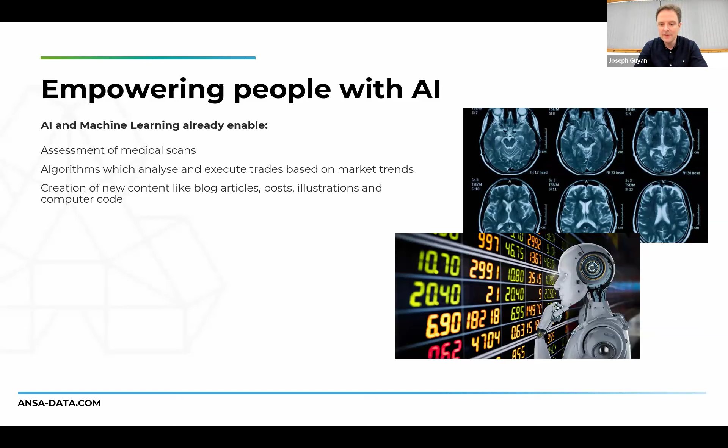Looking at the general topic of artificial intelligence and machine learning, it's a huge topic at the moment, and you've no doubt heard about it already. If we look at it in the world, we can see that medical scans are being assessed quicker and more accurately, or helping experts to assess those scans. We see AI analyzing market trends and performing trades. We see AI generating content, articles, blog posts, and even computer code.

Just like all these well-known applications, we're using AI and ML techniques to help you become an expert with logging data. We're trying to speed up time-consuming elements of checking data, processing it, and then presenting it. You need to process the data and then give out that report at the end of the day. So this is where we're helping you.

Just like where your phone might be telling you where to eat that night based on what it knows, Clarity will be telling you and your crew offshore what steps you should be taking next.

So we're narrowing it down a little bit now with multi-finger caliper processing in particular. As I talk to various elements of Clarity, wherever we're solving problems for you quicker than before or more accurately or reducing complexity, this is basically where our expert system comes in. So an expert system allows for consistency of approach, cost reductions through reducing human involvement, all the while increasing accessibility.

So we call this expert system PRISM. This exists within the software Clarity. Wherever we're using these new techniques to make the job easier, we'll be using what we call a PRISM module. And I'll just talk to a couple of those before the demonstration.

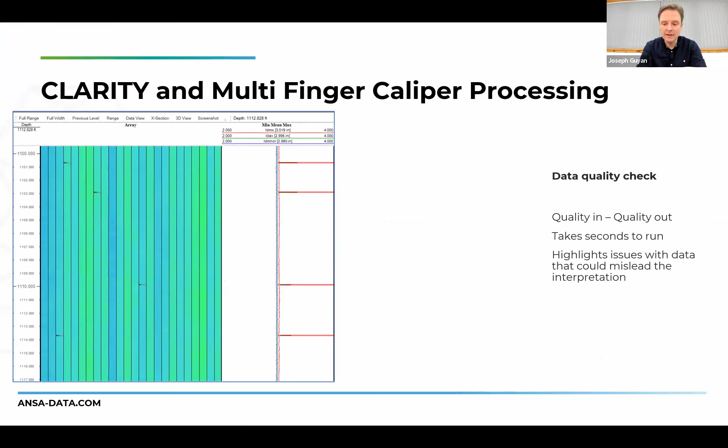You want to identify any issues that are present in your data set that might hinder your interpretation. You can use the Mark 1 eyeball to scroll through your data set, or you can use PRISM quality check, scanning the data for you in seconds. It is literally seconds, for any patterns consistent with any of the quality issues that could affect your data set. We'll see this action in our demonstration, but this is what it's going to look like.

It's actually going to scan your caliper data set and report on some of these tests, perhaps looking for clogged or malfunctioning arms, tool stick and slip, which can affect your data set and your interpretation. On the screen there, we've got a report of some data spikes. A spike is very easy to identify automatically, and we'll see that getting treated in the demonstration. This report really just highlights the issues, saves time scanning. We can also offer editing tools at this point as well.

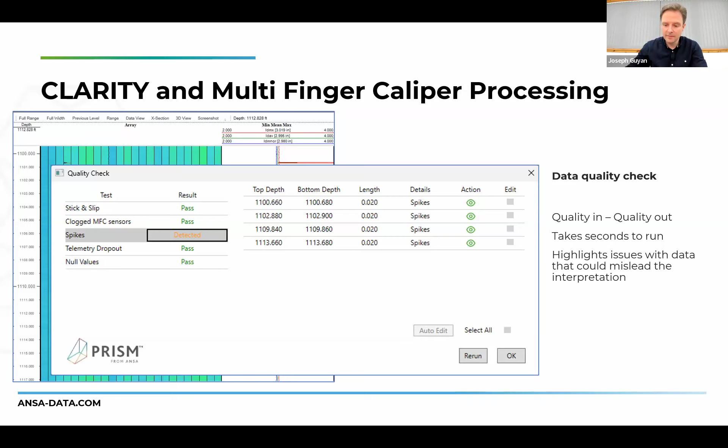Next, I'll touch on centralisation. This is one of those topics that is easily worth a number of hours, you can talk about this forever. If you want to break it down very quickly, it's a process that you absolutely need to do. You need to deliver some of the values that you can talk about in the report.

It's a great place for PRISM to actually interact and help you, because there's a number of parameters and options that are available for users to choose in different pieces of software, and that takes expertise. So this is definitely one of those places where you want to click on PRISM centralisation to give you the correct answers.

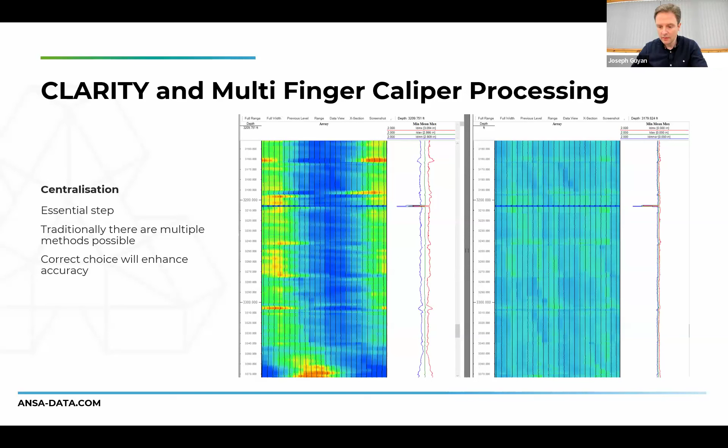On the screen here, you can see a visual representation of the choices that Clarity and PRISM is making for you. On the left is your recorded values with a number of high radius values and a number of low values. So centralizing this data set should require a varying number of parameters to be chosen all the way through. In reality, what happens is a compromise situation where the analyst will be forced to choose just one to cover this little interval here.

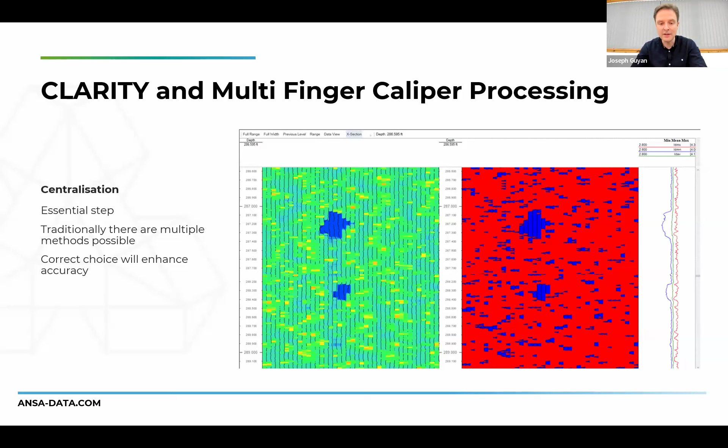So we have only 2 feet of data on the screen. You're probably going to choose, a person would probably only choose one method here, whereas Clarity can actually, if required, can make a choice at every single depth step. So in this case, 2 feet, 200 data points, 200 depth steps. A human is never going to be able to make 200 choices here just to cover 2 feet of data, and the average survey could be 8, 10, 12,000 feet long. So this kind of processing technique and power is new and available to users of Clarity.

We're going to get stuck into it's actually a video of Clarity, which I will talk to. If you ever get me for a beer, I will tell you why I'm talking to a video. Nothing's been doctored. We're playing at real speed, so I'm not trying to pull the wool over your eyes.

But the demonstration is going to concentrate on PRISM workflow. So this is a very specific aspect of Clarity. It's designed to take the user through from the import of data all the way through to the report. We'll do this live, essentially live. This is a great introduction to many of the processing elements, and some of the terms and phrases might confuse you if you're not familiar, but please feel free to get in touch and we can talk to those next time.

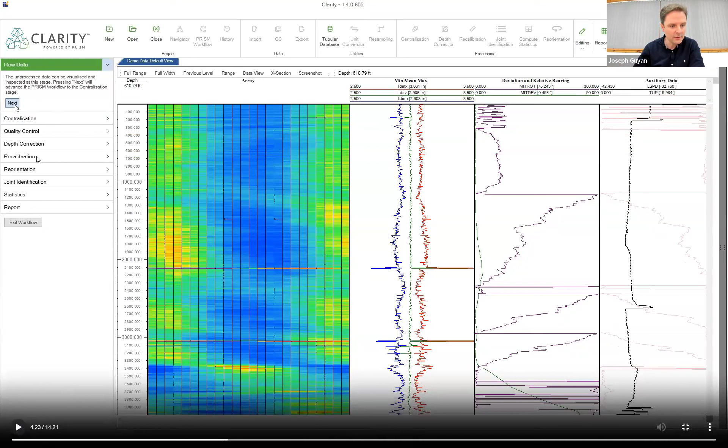Let me just start the video off and see where it takes us. Along the left there, where the cursor is at the moment, I'll just draw another squiggle. There we go, over here. So we're working down that side of the screen, all the way through the different processes that will take you through to the report.

The first step is centralisation. I'm going to leave it running here. This survey is about 4,000 feet long, so it's a little on the short side.

You can see in the background there, let me just pause it and draw a little circle. So in the background there, that's the part PRISM's taking care of for you. It's choosing which parameters to use while you centralize the data - the outlier count, the geometric function, the method. It's choosing the best solution at every single depth point.

Differing well conditions is why you want to do this. If you have deposition and high radius values from damage or corrosion, you really want to vary the method all the way through the data set rather than being forced to choose one, or possibly two or three. It's making those choices all for you.

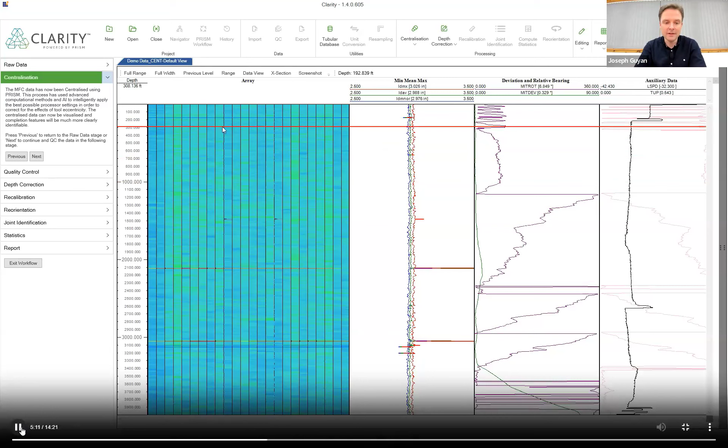There's our centered data set. Simple, yeah, there we go. I've just clicked on full range there to show the whole thing. Simple viewing controls, just like for a Microsoft document, it's all easy stuff. Control and scroll to move through it, and mouse wheel to move up and down.

Pause it there for a second. Here we go, this is quality check in action, so we'll see how long it takes. That was for 4,500 feet, I believe, or 4,000. And it's detected some spikes.

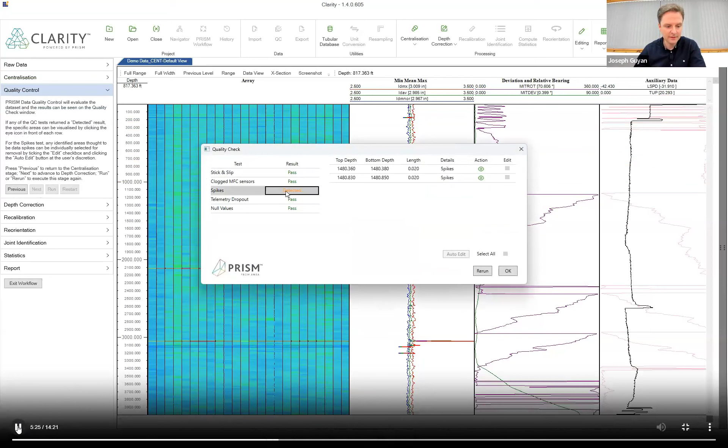So we'll see, what can I know about my spikes here? I'll click on this zone here, and it's found me a couple of spikes. I'll click on the eyeball, show it on the screen. A spike is really quite easy to detect.

It's definitely something you want to remove. We see spikes from telemetry errors, perhaps tool errors, or interference at surface from your cabling. It's all sorts of stuff, and you don't want these sat in your data set appearing to be holes.

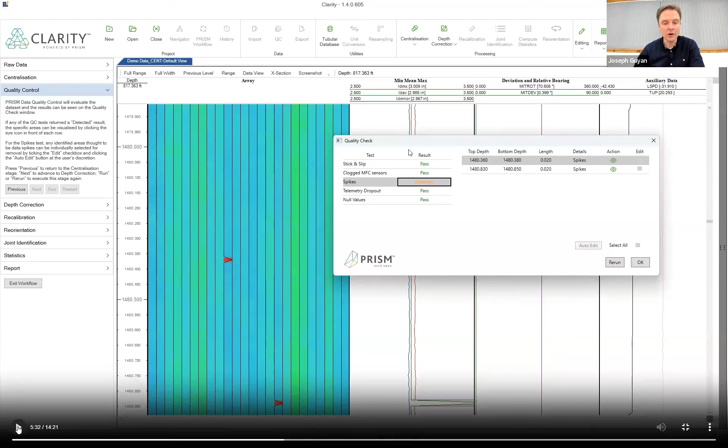So let's get rid of these real nice and quick. All we've got to do over here is just select them for editing. There we go, and auto edit.

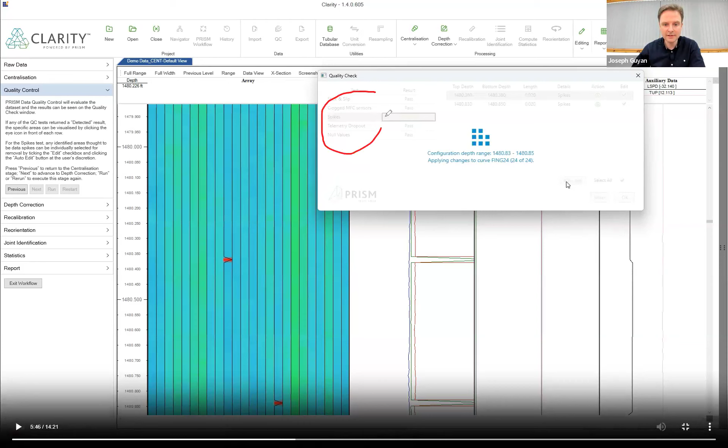The other tests that we've got at the moment are stick and slip. If you're not familiar with that, it's irregular tool motion, and it's very difficult to correct for, if not impossible. That can impede on your analysis, so unfortunately it's basically impossible to fix. You need to know it's there, and you need to know which zones you want to look at.

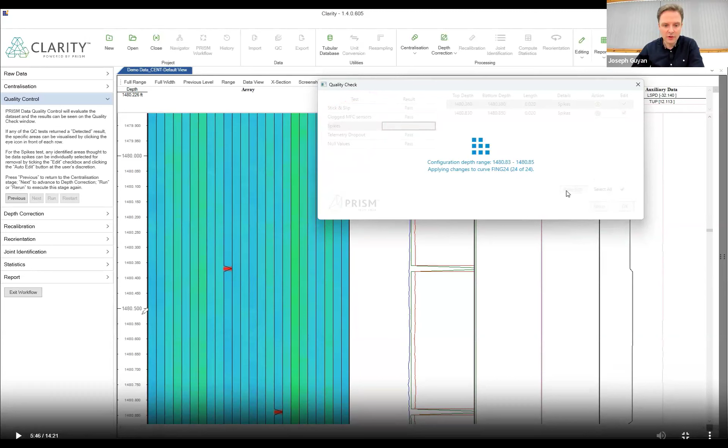This isn't the end of the story either. I'll refer to this again as we go, but we are continuing to work on what we check for. Deformation is definitely going to go in here. Deformation is also a feature of the tubing that you're not going to correct for, so you don't want to edit that out. But during centralisation of the data, you can mask the presence of deformed tubing, so during quality control you really want to find those zones so you can report on them later.

That's coming too. Now on the left there, we're just hovering over next - again, this is PRISM workflow. If you look at the top of the screen, all the options are available for you. An expert would definitely be able to work through these and pick it up really quickly, but a novice user, or someone who just wants to get through this a bit quicker, they definitely want to be using PRISM workflow. It's where to be. You can just move your way down on the left side here.

So here we go with PRISM depth correction. Now, you saw how long it took - it took a couple of seconds there. Earlier on in the process, when I set the project up, I entered some values for three completion items: a safety valve, an SPM, and a nipple. Depth correction is again an essential process for processing caliper data. You want to match your data to a known reference, and typically in this world we use well schematics, and we use items on those schematics to correct the data too.

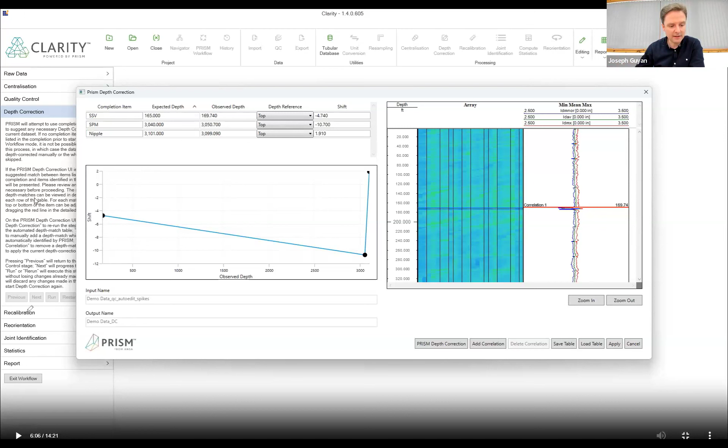What we're doing with PRISM depth correction is scanning the data set for those items and finding them automatically, then creating what we've called depth pairs, so you can see expected and observed depths. On this little window on the right, you zoom in, and that's where PRISM has automatically found the top of that SSV for you, the safety valve. We're going to look towards the bottom, and I'm going to make a change here - it's a simple matter of clicking and dragging that red line. So these depth correction points I've created now, three of them, just like that.

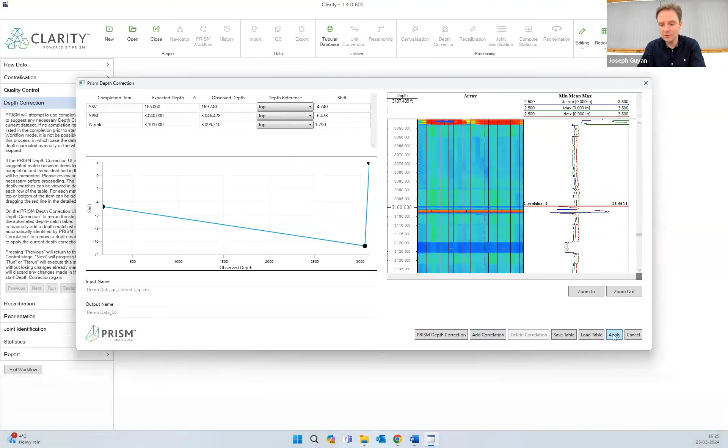I haven't had to scroll through the data. I haven't had to type any numbers in for the observed depths. I've created what we call a shift table, so we're going to shift the data to these three points using those values. What I can do is save that depth correction table for later use or reporting, because some customers like to see what depth corrections you made, perhaps for the next operation, if you need to find a particular joint or item for your next intervention. And then we hit apply, and that's our depth correction done.

You can also add in manual items there, so manual rows. Perhaps you wanted to put in another zone of interest, when you're away to set a plug somewhere, and you know the five joints that you're going to set it in, and you have a tally. You want to be really bang on depth for those, so you can add it manually as well.

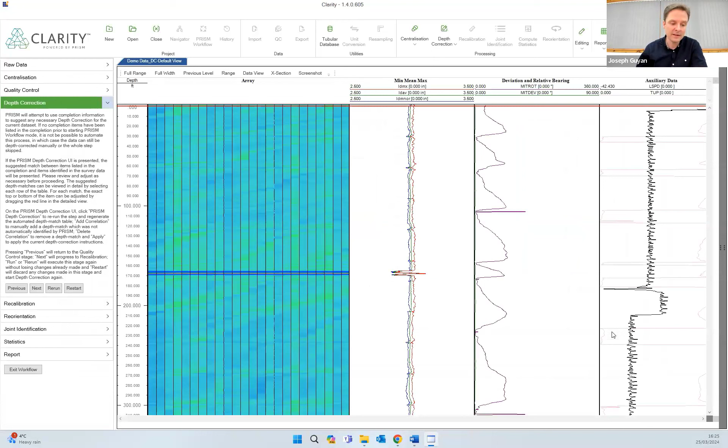Right, so I'll pause briefly here for what we've called recalibration. This is another big topic, you can talk a lot about recalibration. The quick version would be: your tool is calibrated at the well sites by the engineers before they run it, so that's done, that's not what we're talking about here. What we're offering here is a software tool to correct for various things.

So temperature related drift is one of the big ones that you might be forced to correct for. Tools are normally, the caliper tool is normally corrected for temperature, but there are instances where you see temperature related drift and you have to correct for it, and that's a very manual process. It takes the user a fair amount of time and experience. So the first thing we do in PRISM workflow is ask: if you want to correct for this, can we have the nominal IDs of the collars? And we use that to correct the survey for any temperature related drift. Big topic, and that was just an intro for you.

But what we're actually going to do with this data set is we're not going to do the temperature related drift correction.

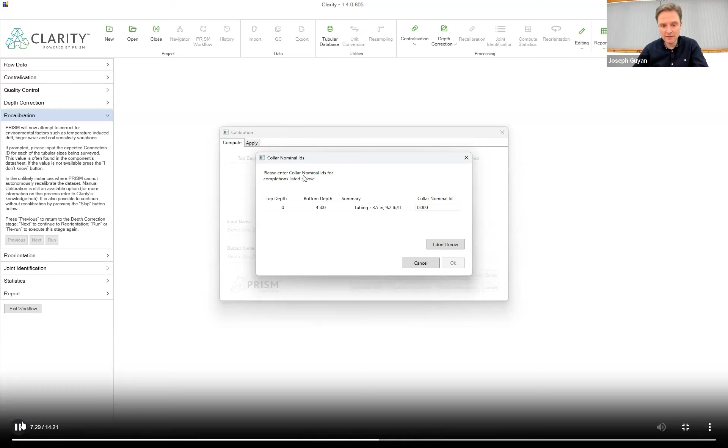Yep, we don't care about collar nominal IDs for the moment. We're going to click on... there we go.

Pause it here. So we're going to do what we call a modal joint ID recalibration. No matter how well your tool is calibrated, you can make a small soft touch recalibration using the data. You're not forcing it to any new values, just doing a soft touch recalibration to tidy up for any minor drift between your arms.

This is, I would say, present in the vast majority of surveys, and we can easily correct for it with PRISM recalibration. In the background there, I'll just get my little pencil. Here we go. You can see a top depth and a bottom depth.

What the experienced user has to do is spend time looking at the data set, deciding which zones to use to correct the rest of the data set, and where to create shift values. And that can take time and experience.

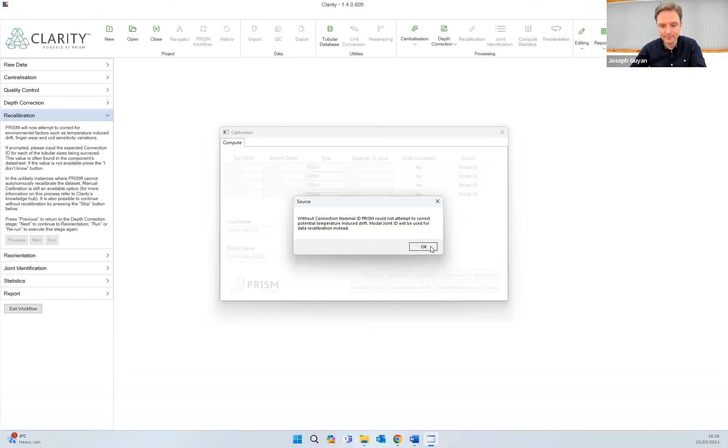So again, another great place we can save you time. We've created this shift table for you, saving you a whole bunch of time. That's that table in the background, and it's just going to go away and apply those changes.

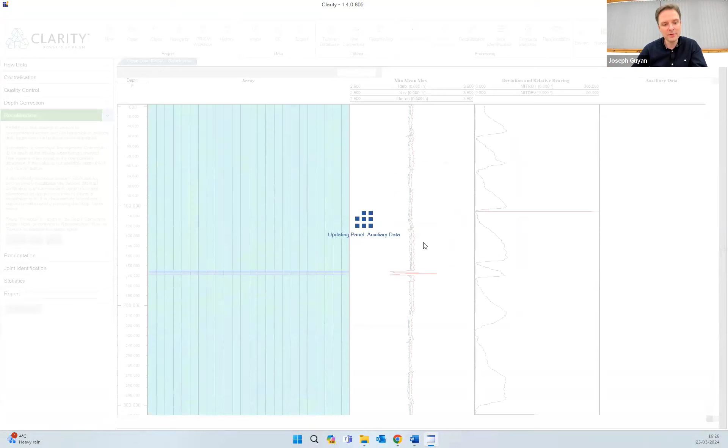When it comes to using Clarity for yourselves, each time we run a different process, we're creating a new data set within the project. So if you want to, you can. It's always a good idea to have a look at the recalibrated data set, which is this one on our screen now, and compare it with your first data set on the way in.

Reorientation, that's a simple step to apply. As we set up the project, we told Clarity which curve you need for the reorientation process, and another piece of information, which is which arm was up during the calibration process for this sensor.

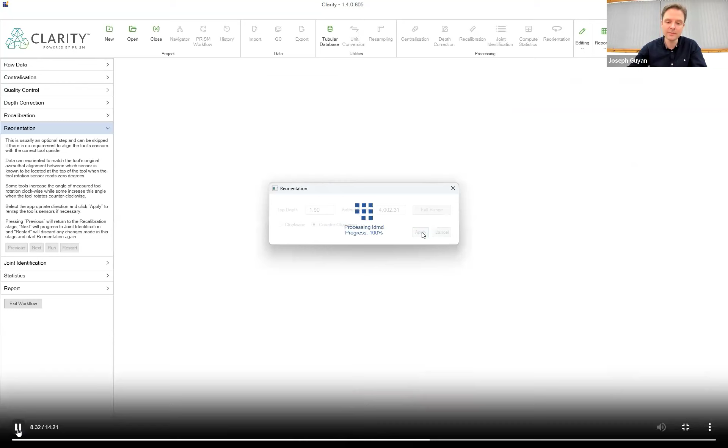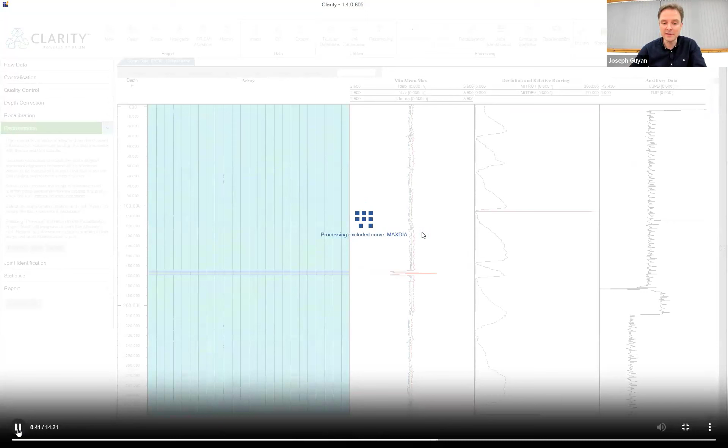So you need to know that from your acquisition company. The defaults are typically presented for you on the screen there. So counterclockwise is the direction, and arm one is usually the right one.

So why do we reorient data? It's a great tool for visual understanding of the data. Your MFC tool string will rotate as you log up during your survey, and depending on your experience level, that rotation can kind of confuse you a little bit. But you can actually remove that effect in the software.

Perhaps if you want to know, does my SPM, is the mandrel facing the high side or the low side? I can't tell because my data is kind of twisted around. So I reorient my data, and that means the high side indicator will tell you exactly where it is.

It's an optional process. Many people don't do it.

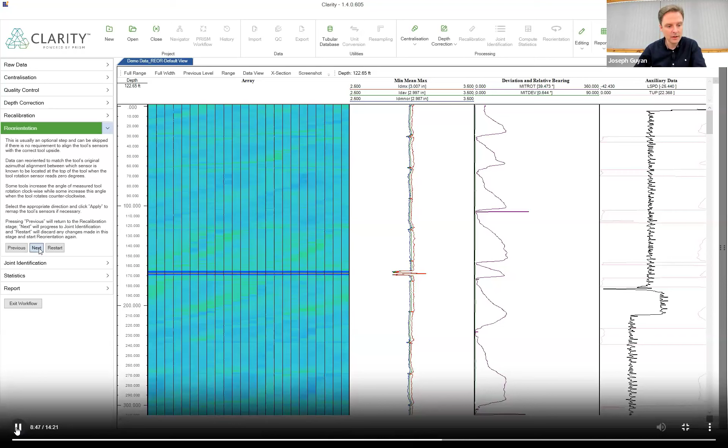Here we go. Now, you blink and you miss it there, because what we've done here during joint identification, we found every single collar that we need, because what we want to do is break the survey down into the joints, individual joints of tubing and casing.

And we've got an awful lot of data here. And if we ever want to talk about it in the report, we need to extract one value per joint. So the maximum penetration, the minimum ID, so we can effectively interpret the data visually.

So we can look at some charts and tables. And to do that, we need to find all the collars. And that, like I said, it's already done. All these red lines, this is the whole survey. These are showing you where all the collars are.

On the right-hand side there, I'll get the pencil. There we go. Got a few tools that control the display of this table. That was a really messy circle. There we go, that's not even there. Anyway, sorry, much better circle.

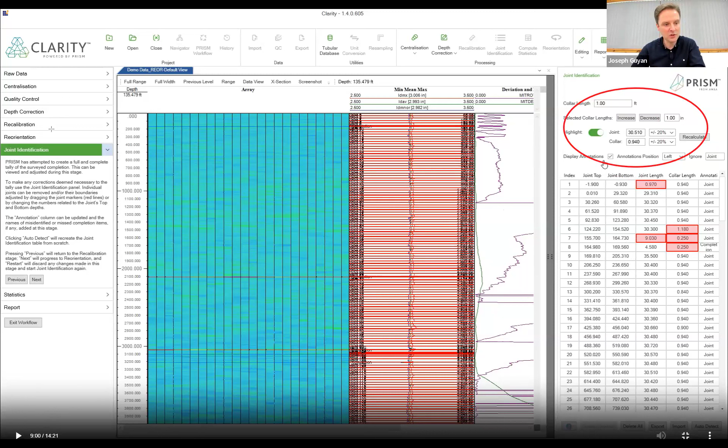Thank you very much. Over there, we've got some controls to alter the display of this table here. So this table is going to help you when it comes to fine-tuning the collar detection. I'll just press play again. Anything that's highlighted red, you might want to take a look at.

You can double-click on this table to have a look at some of these completion items, or you can use the normal controls to zoom in. So what we're working on with Clarity is using these profiles to automatically identify completion items.

So that's a work in progress. At the moment, we've just called this completion, but I know that there's an item we've successfully identified in this survey. We'll see that in a second.

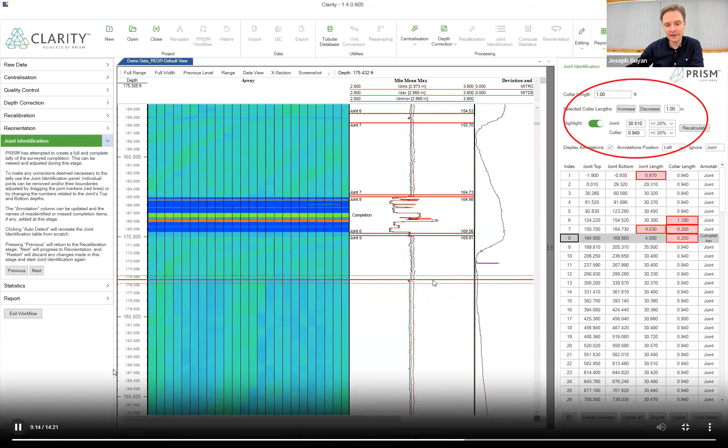So a shift click gets you a new joint. There we go. I'm going to look back at the table, or I can just scroll down the data set. All these joints all found.

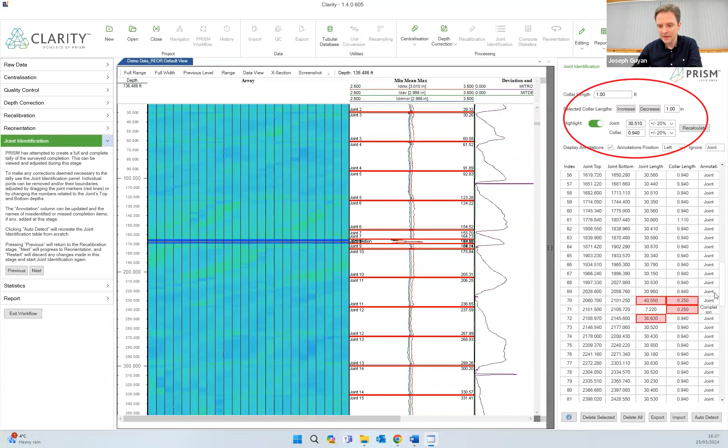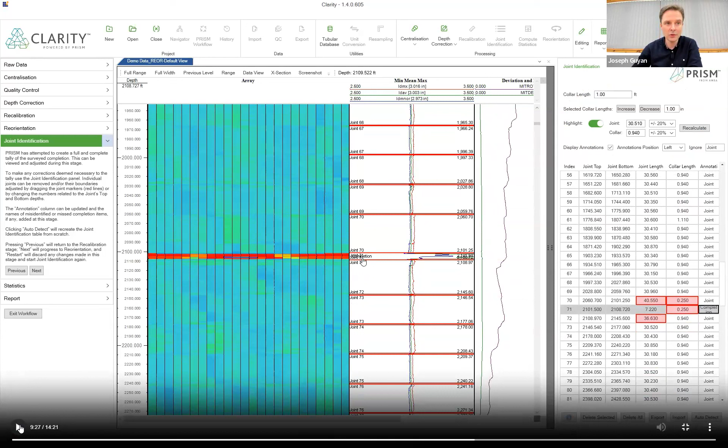Now, normally you'd have to control the detection of these joints. You would have to perhaps pick an amplitude threshold or some kind of parameter that helps the software find these joints. Not so here, you just press one button and it's found them.

You decide, typically I'm going to put in some pup joints here around this completion item. Completion items as well, I should say, everything with the word joint in the annotation column on the right-hand side. What shape shall I use now? I'm going to try a rectangle. There we go, just over there.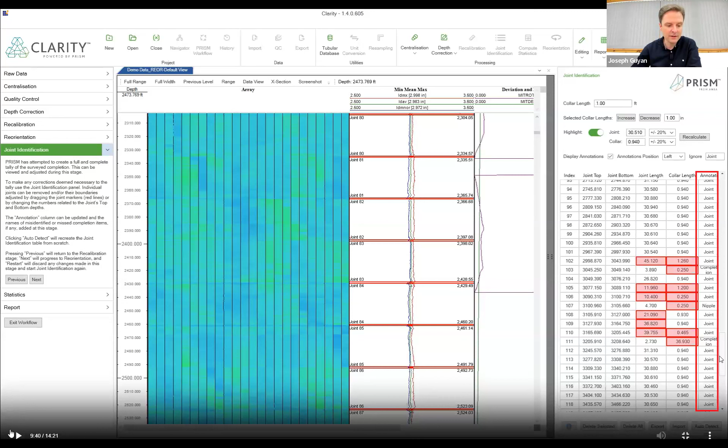So yeah, everything with a joint is going to be taken forward into the reporting and all those charts and tables that we'll see shortly. Anything with any other annotation will be set aside because we only analyze everything we know the dimensions of, which is essentially the tubing or the casing or the liner.

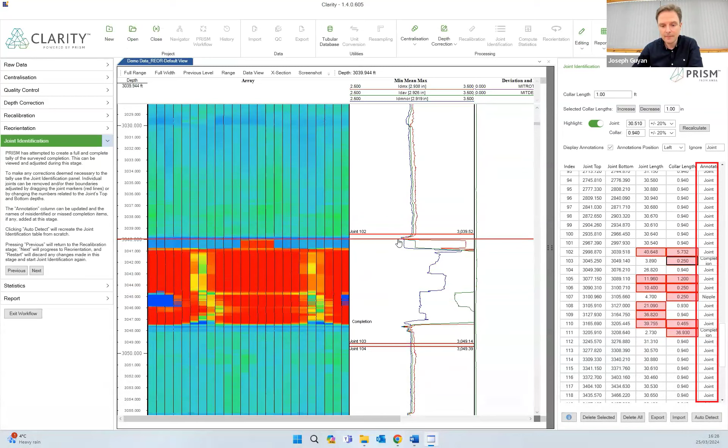There's a nipple there. Blink and you'll miss it. Let's see, just go back. There we go, just on the screen there. So we found this as a nipple, and that's exactly what it is in this particular well.

We're going to add another completion item here, a bit of a peculiar one. And I'm just double clicking on the right-hand side there in that annotation column. There we go, thanks Mario. SGM, there we go.

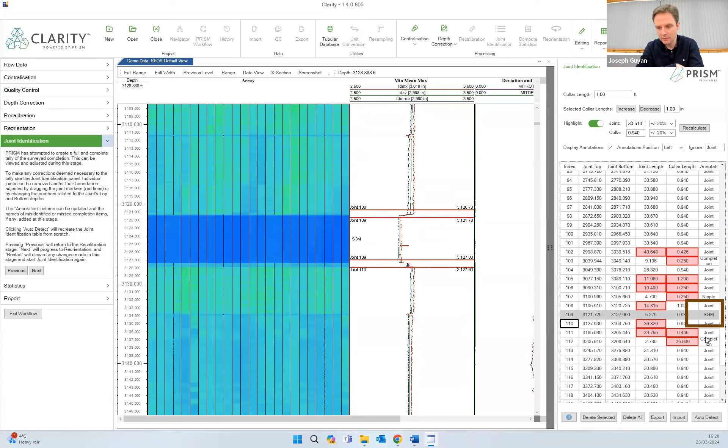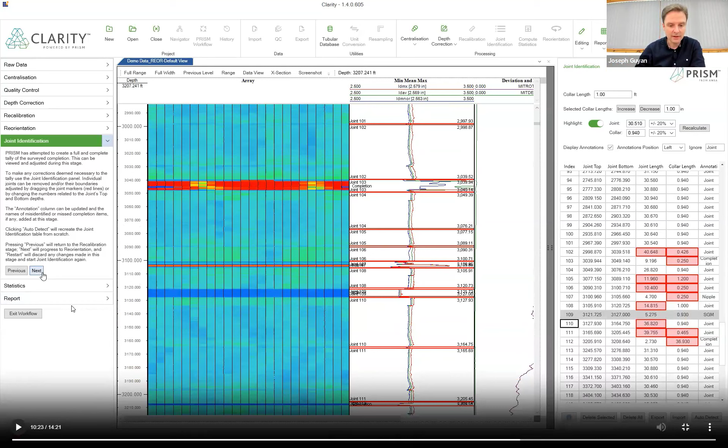So depending on the length of your survey, you can be a long time here as well. It can take a long time to create this table, which is utterly essential for processing your data. You can imagine 12,000 feet, 3 times this.

I should mention on joint identification as well, that's where machine learning is taking part. That's one of the processes we forgot. It's actually quite funny because I realized a lot of the really clever stuff in Clarity is hidden away. It's so easy to use, you kind of forget what's going on in the background.

So there you go, that's the identification of the collar profile, regardless of whether it's long, short, whether it's narrower than the tubing or higher than or greater than the tubing. All that's taken care of using machine learning techniques.

So by this stage, in what we call compute statistics, we finish handling the data, and we're going to create a selection of new statistical values from the data to help reporting. So those are the maximum penetration values which describe corrosion and damage, minimum IDs which describe restrictions, and we're also going to use PRISM damage classification.

Now we're applying descriptive text to each joint. So PRISM looks at each joint and then describes it in a certain way, and we'll see that during the reporting as well. So we can classify a joint as having corrosion, ring corrosion, line corrosion, scattered corrosion, deposits, etc. I'll show you the list in a second. But we're applying this language model to each of these joints to better describe things for you. Again, when it comes to reporting, all the help you can have to get to your report quicker.

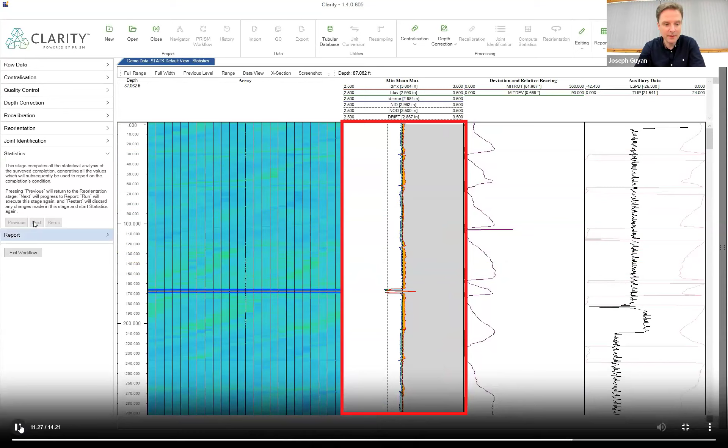It's drawing a new screen for us now, so a screen perhaps a bit more suited to create for images in a report, just with some extra shading rules so it looks a bit nicer. There we go. Someone's better at drawing squares than I am, that's for sure.

Right, I'm going to pause it for a second here. So this interface here is where we create the report. So we're building the report from a Word document. So rather than have some kind of plain layout PDF that is created in the report, we let you make a template.

So this template, you'll see it in just a minute. We've created it with our own branding and our own logos, all that sort of stuff. But what we can do is help you create yours. So these templates are linked to Clarity with merge items, so it can take various values, various text and images, and get them all into Word for you. And then you can take that Word document away and perhaps make some fine-tune changes to it at that point. And we'll see that as we go.

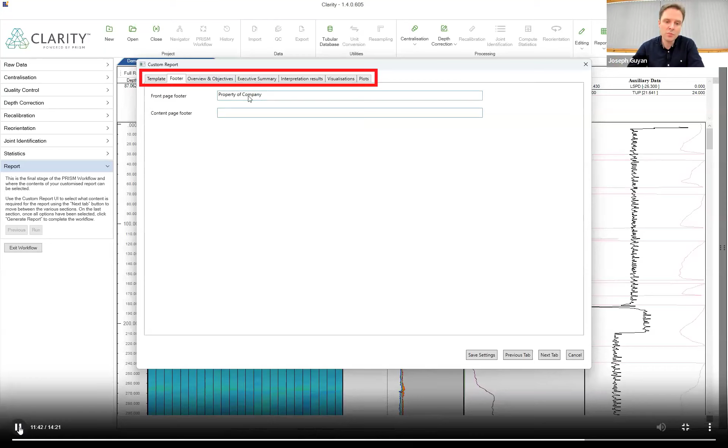So as we work through each of these tabs, you can start entering some information. Again, this is what we think you want to see in your reports, but it would be great to see more people feeding back on this, what they would actually like to see.

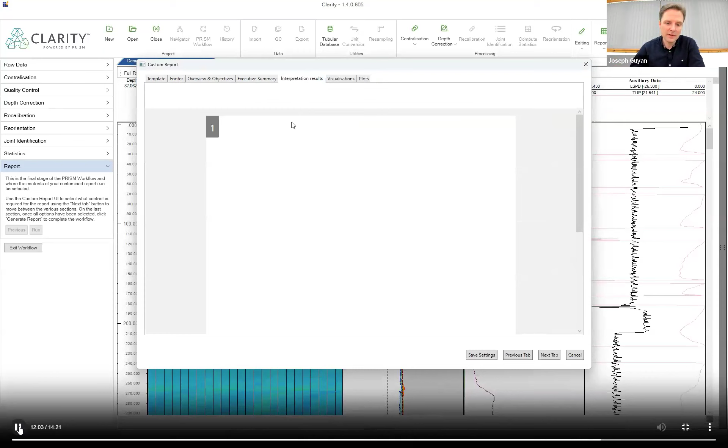We've included some sections for typical items like survey objectives, and comments about the logging job itself. What we quite often see is people wanting a summary section, to answer the burning question about your survey - are there any holes, what's the minimum ID down to 2,000 feet, that sort of stuff. And then a space for some more in-depth results too.

We've got a tab here to control the visualizations. Again, this is where we're starting from. Do you want to include some images in your report? Here are some suggestions - do you want to see a full range overview? Typically, yes. Quite often, people want to see their completion items.

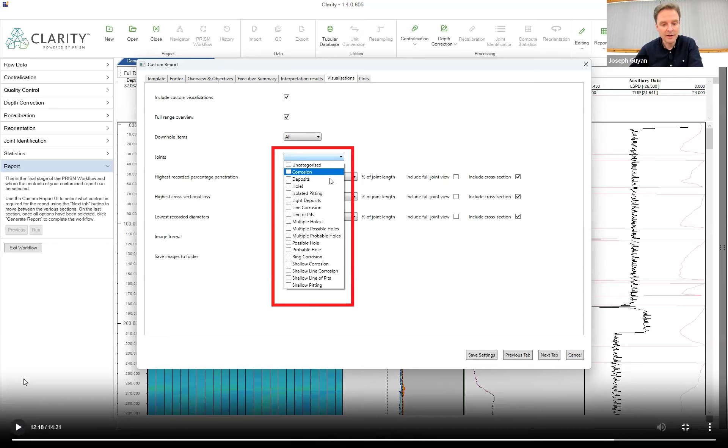Are my safety valves in good condition? Are my SPMs clear of debris? Pause it for a second here - this is where the PRISM damage classification comes in. So perhaps you've got a nice clean well, and all you want to know about are the higher penetrations. Perhaps it's the opposite - perhaps you want to know how much scale and deposits are in my well, and do I have to do a cleanup? So you can choose to show just those categories.

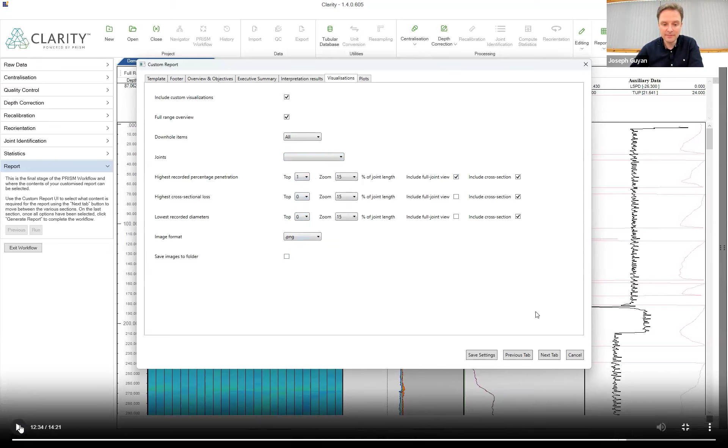And then typically what people like to see - where's the biggest hole? Can I have a picture of that, please? Or where's the biggest damage feature, corrosion feature? Or where's the lowest ID, and is that going to cause me a problem?

One more tab, and we're nearly there - a selection of charts and tables that we feel are going to be of use to you when it comes to your reporting. Again, a start point, so we can tune these to what you actually want to see in your reports. If there's a particular layout you like, we've got things like the percentage damage aligned with borehole deviation - that's quite an interesting chart.

And then we can classify things as well using different preferences - really, how many joints have features above 80%? Perhaps if that's your cutoff for a workover or a repair job. You can tune these, and we'll help you do that.

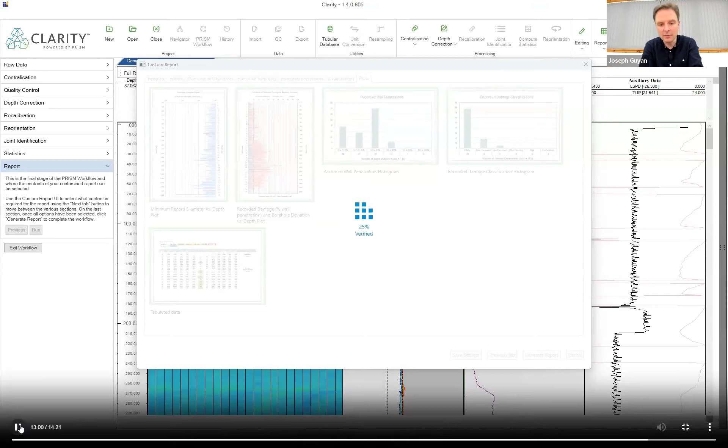We're letting it run now just to see how long it actually takes to get a report. It's going to take those images for us in the background.

The reporting is quite a bit, depending on your background - quite often the answer's already in your head, and you could phone someone up, you could send a quick email and describe the position. If you wanted to skip the report and keep the operation moving, you could easily do that.

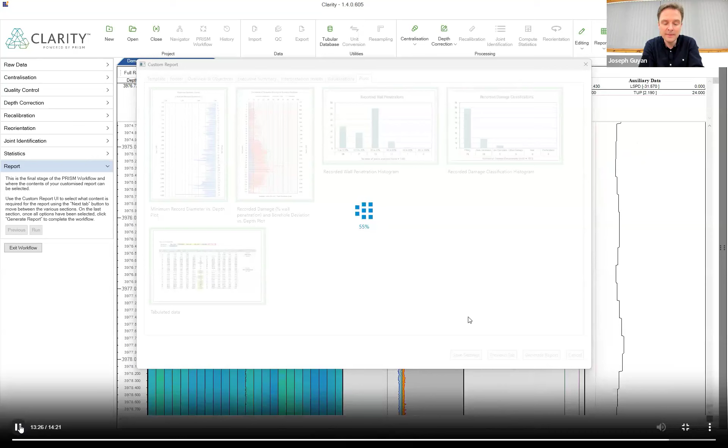The delivery of a report, though, is typically required. The operator would like to see a record of what you've done.

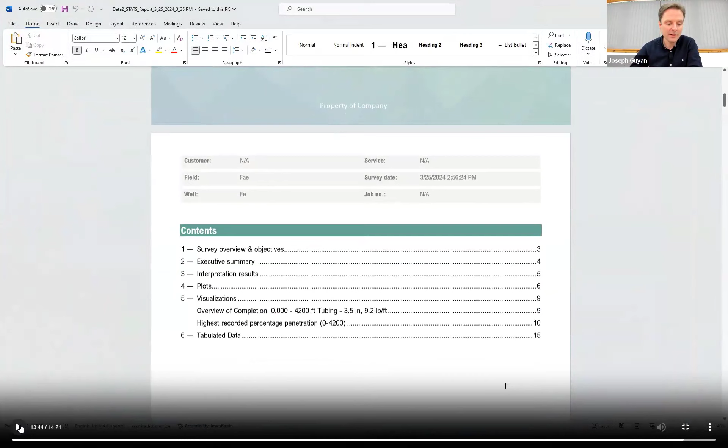And some aspects of this are time consuming - you have to put in the field name, the well name, the customer name, all this sort of stuff. It all has to go in, and it all has to be right, or else you're going to look silly. So you do all this at the beginning of the day in your project setup. You don't do it in a hurry when you're processing the job - you do it the day before when you can set up your project and get it all right.

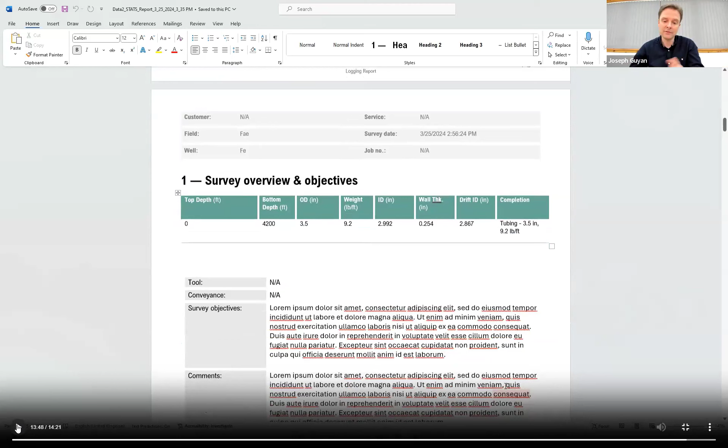So here you can see the branding, the colors - you can just imagine your own colors here. Aspects there include the word tabling - you can set all that up ahead of time so that the tables are automatically created, the headers are all automatically filled in. The table you've got there takes information from the project as well, so you don't have to waste time there. We'll scroll through now.

You can then edit the report in Word, so you can carry on adding some findings yourself. A project for us is actually to help you here too, so we can actually look at the data. Using language models, we can take the Clarity process values and create some text around those, and start you off, getting you kick-started on the interpretation results with some actual text.

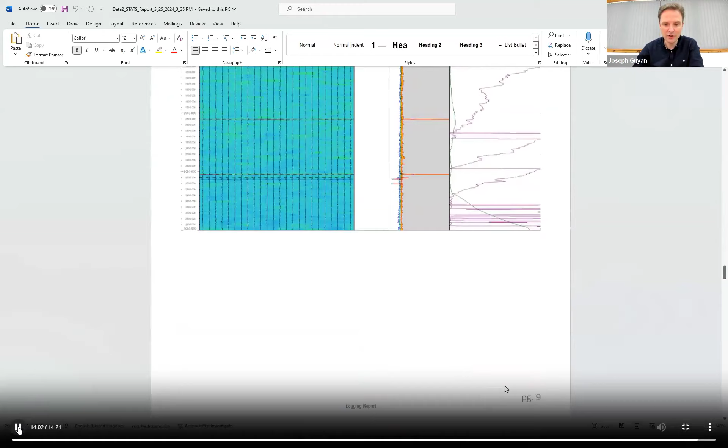Here's those plots, just let that scroll - and just simple stuff, you don't want to be spending time pasting this in. I've been there, at 2 a.m, pasting in tables and fighting with Excel to get this into a presentable format. Same with these images - yeah, you don't want to be cutting and pasting all night or all morning. Here's a table for you as well.

Okey-dokey, it was a whistle-stop tour. I'm just going to stop sharing my screen.

Here we go, so that was a whistle-stop tour of one data set. That was about 15, 20 minutes to process that one, and I recorded it as I did it - so it was a live one.